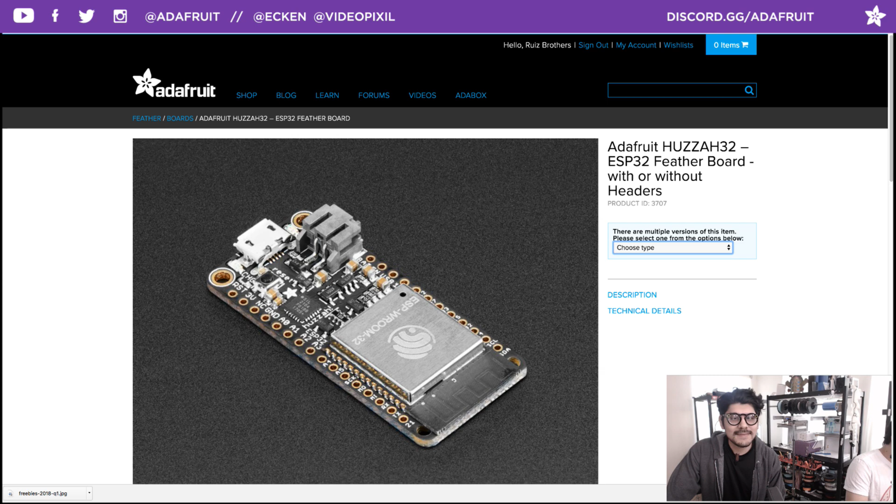There's also some hardware, links to some screws, and these awesome stickers from Pyramoni. I don't know if I'm saying that right, but you can get those stickers because they're really nice. Without them, the product just wouldn't be as cool. There's also wires, tools, and small stuff like heat shrink tubing and mounting tack, which is great to have for your projects.

Let's take a look at the software real quick. This is written by Dean, who works at Adafruit, and Dean put together the firmware for talking to the thermal camera sensor through I2C and other things.

You can check out the learning guide for the sensor. This is the GitHub page, but it's really where you want to install the Arduino libraries, and there's a SiLabs driver for getting the ESP32 up and running with your Arduino IDE. If you haven't done that yet, this guide will walk you through it. There are some different sketches along with the library, and we also have some demo code for running on a Raspberry Pi, so you can check that out.

We have some different ones, but if you're not using the ESP32 Feather, we do support other microcontrollers like the M0s, although they're not as fast at sampling as the ESP32.

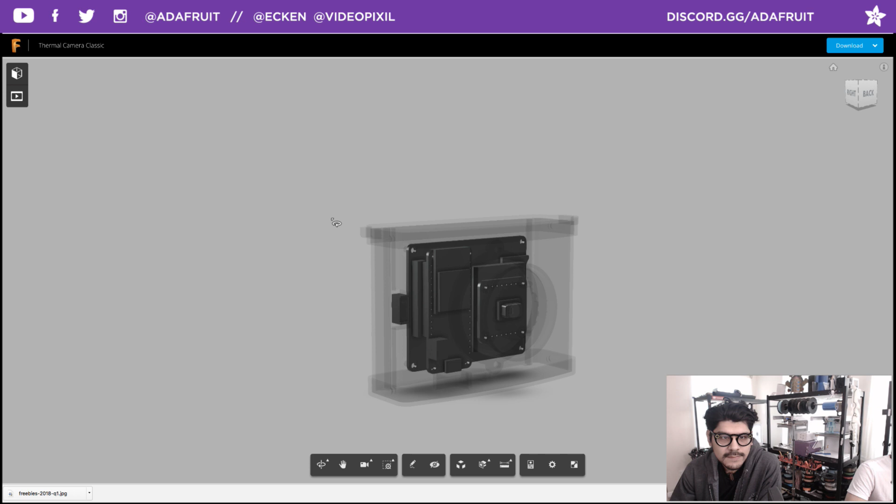To grab this source file, you just download that link and it'll give you a preview to see. This is really cool - the way Autodesk makes their public shared links, these interactive models that you can play with in your browser. Then you can download it using the top left or top right link, and you can download it in different file formats, or just grab the STLs if you want.

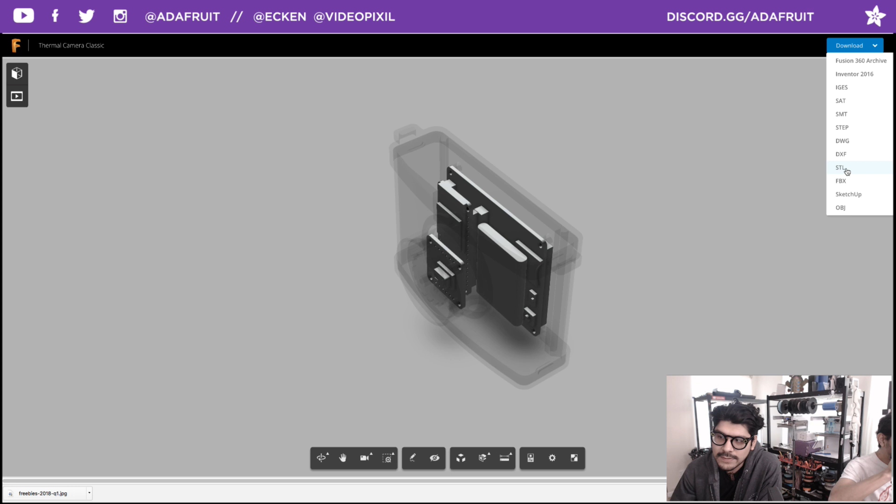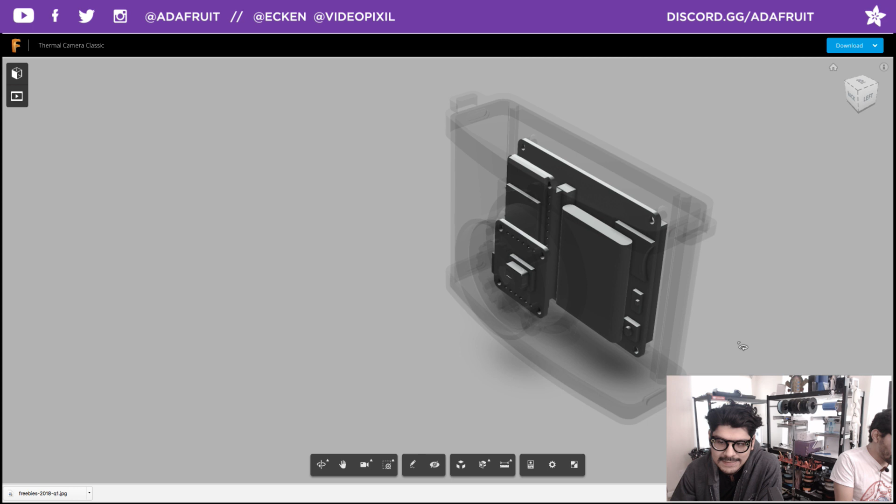If you download it as the Fusion 360 archive, you can extract the components like the AMG8833 thermal camera sensor or the ESP Feather. And the battery - I have a 500 milliamp battery here - there are some features here in the display that are definitely necessary if you're doing a project that needs to break these out. There's a micro SD card slot, a built-in on-off switch, and a reset button.

So it's really handy to model your components out. In this case, I was able to find the exact spot where I need to fit the battery, otherwise it would fit over that reset button and bad things would happen. But other than that, it is a fully parametric design, so if you download it you can see a timeline showing all the different steps that make it come together - it's pretty neat. It's also user parameter driven.

Real quick, I want to show you guys some updates that I made to it that didn't make it into the video. Notably, there's these little loops now on this top cover, so it's really easy to pop off these covers and make custom things to it with little mounting pieces.

They have a different way to make the snap fit nubs. They're just a different shape, but built the same way, just a different shape is all. They're built with the slot tool. So this allows you to add a little loop and hook to it so you can wear it.

Probably the more important thing is to add a tripod screw. This is a 3/8 to a 1/4-20 tripod screw that we have available in the shop. We like to do a lot of camera type things, and this allows you to mount it to a tripod like this one here.

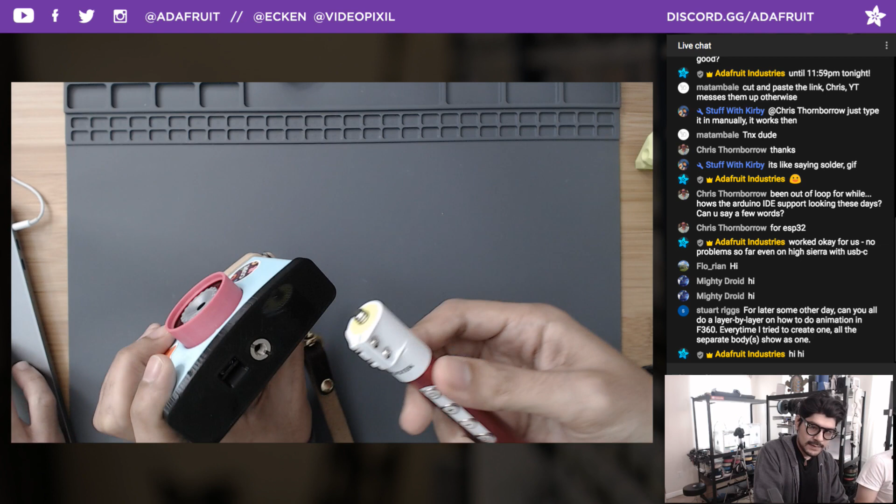This is like a selfie stick type thing. It worked out for the shoot because I needed to get it off the table, and I was like, wow, I should really design a thing for it. So here it is. I got my selfie stick with my lovely camera, or you could go with the strap here, which I guess I'll wear now. Like that. So there you go.

I actually got this for Christmas. Thanks, Pedro. It's a leather strap meant for my iPhone, but now I use it for this.

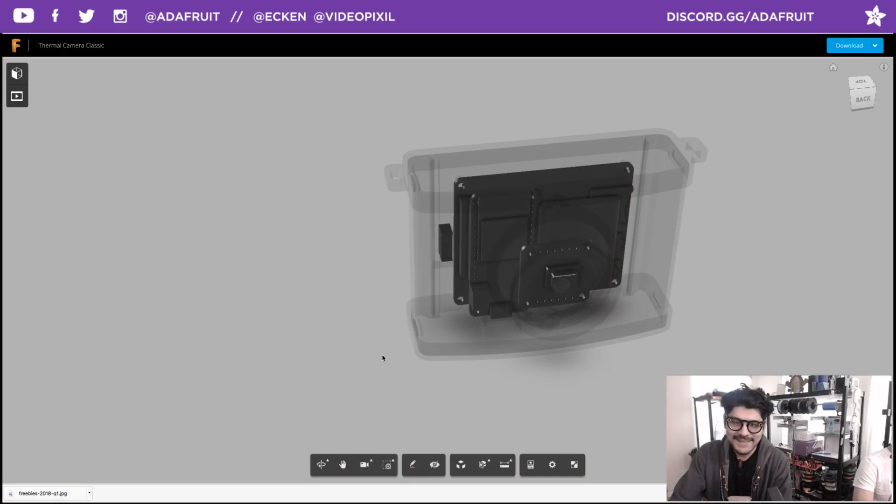Very cool. That's pretty much the updates that I made to it. And again, if you want to download the source files for it, I recommend you do so.

It's really good. Let's talk about the slice settings real quick. I've since changed up my slice settings a little bit, since we are using 2.85 filament on our Ultimakers.

Your tolerances might vary, so I thought I'd take a quick snapshot of the slice settings. Notably the line width, which is the width of the actual filament coming out of your nozzle. I have that set to 0.38. I believe the default for Cura is like 0.34, so you might want to play with those values to get the right tolerances. But other than that, the assembly is pretty straightforward.

You do need some hardware screws to attach the fake lens hood to the camera body. And I totally recommend using a brim, which helps the bed adhesion on your printer. Whether you have a heated bed or not, I definitely recommend using it, at least for the camera body, because it is a very thin frame, and that frame can fall off the printer if it doesn't adhere properly to the bed. So that's what I recommend.

Everything else is pretty straightforward. No support materials required for any of this stuff.

Moving on to the actual assembly, I always start off my projects with an on-off switch because it's pretty crucial. This one's wired a little differently, since there are header pins already soldered to the ESP32. I just went ahead and soldered the wires directly on top of the headers because they came that way. I couldn't get the non-headered version, so they already had headers.

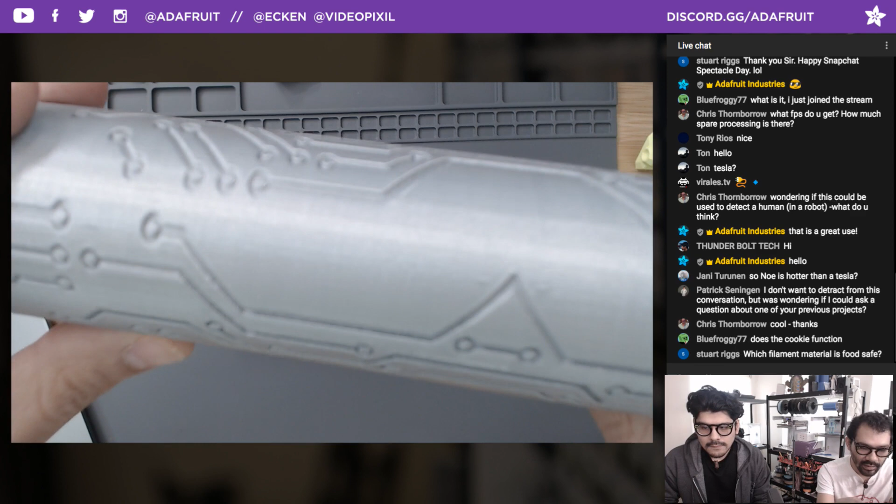Am I still on the overhead? Yes you are. Take a look at the traditional way of attaching a feature with a pattern around it - you're going to get distortion right at the edge where all the cylinders are, where it starts curving around over the texture. You can see it quite prominently here, all the circles are completely skewed.

The way we originally tried to do this was with non-linear deformers inside of Maya, but because it's not a real solid, it's just polygons, when you print this out it's going to be pretty low resolution in terms of having all the subdivisions show up in the print. And when I tried this in Fusion 360, the deformation that occurs is something we didn't like.

Then we saw a really cool tutorial by Vladimir at Desktop Makes using the brand new features inside of Fusion 360 in the sheet metal environment. So what you're essentially doing is creating this as a flange and then unwrapping the sheet metal object.

Let's take a look at the CAD of this, because it's pretty difficult to explain without visuals.

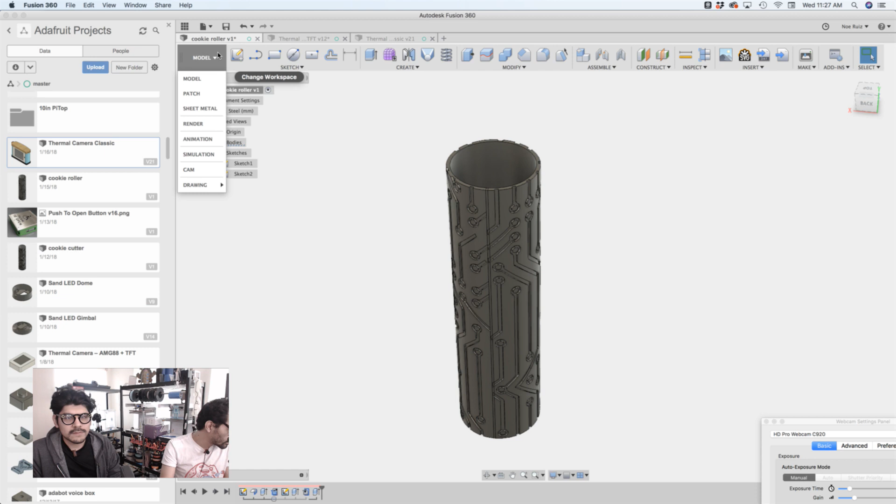Inside of Fusion 360, there's a new workspace called Sheet Metal, where you can build designs with tools specifically made for sheet metal. But you can kind of hack it or reuse it for something it's not really meant to, like this.

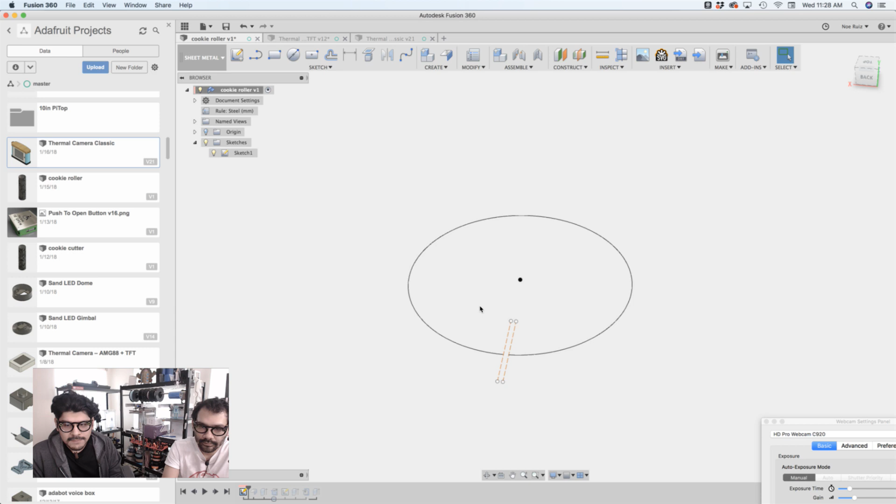If we step back through our timeline to the very beginning, this is just driven with a single sketch, basically the profile of the rolling pin. There's a little bit of a tricky thing you have to do, you have to kind of split it, we'll go over that next week.

Let's advance, just go and extrude it out. This is extruded out as a flange.

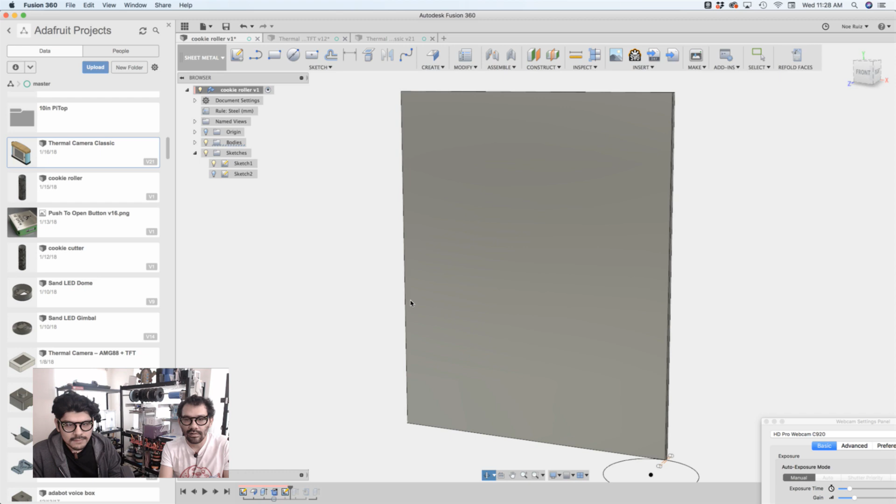Then here's the trick, which we'll talk about next week, or you can check out Vladimir's well thought out tutorial on this: unwrapping it, adding our SVGs for our patterns, punching these out, and then refolding into the cylindrical shape without any distortion. You can move around all your sketches so it has a seamless, repeatable pattern.

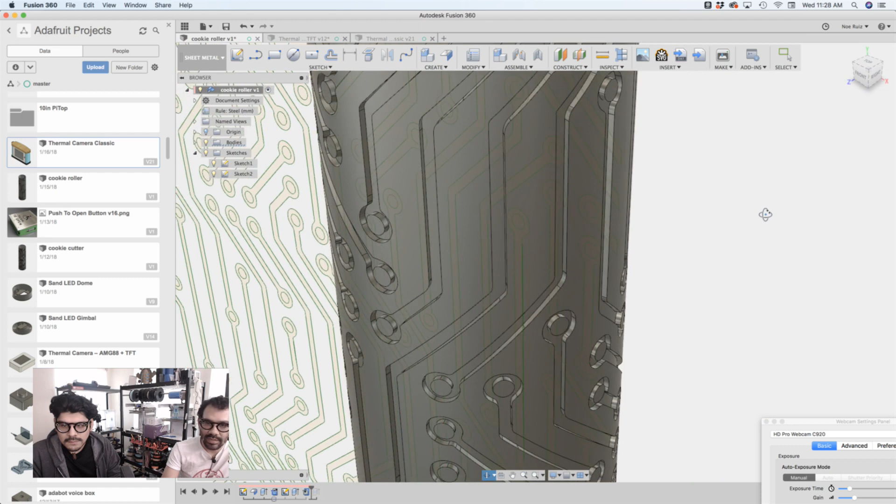And this is what we come up with: non-distorted circles, a beautiful, seamless pattern on a cylindrical geometry. Pretty cool, huh? Yes.

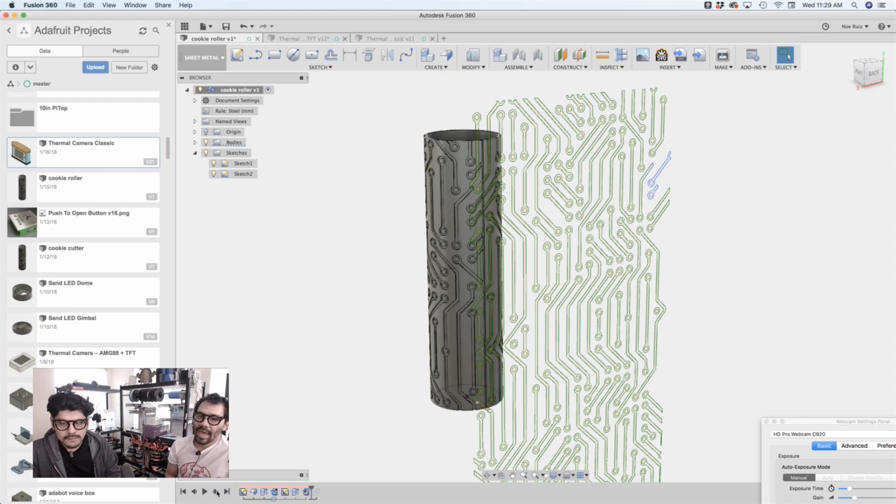Everything is all editable. It's pretty easy to drop in any other type of SVG or move any of the paths around to update. If you're looking for a way to do seamless patterns, you gotta tweak it a little bit, obviously, but once you have this technique down, it's pretty straightforward to come in and modify.

That's pretty much how I put it together. There's a little bit of other trickery you have to do to make it a solid body, but other than that, you're ready to rock with this rolling pin.

That's what we've been working on. If you check out the Instagram, you can see some of the progress. We already finished shooting the assembly on that. The only thing we have to reshoot is using non-rising dough, since store-bought dough is a big no-no. We're trying to build our own artisan cookies.

One question everybody wants to know: is PLA food safe? It should be, yeah. I don't recommend using it more than a couple times because you are going to get food particles stuck in there. You can see there's some flour and dough all stuck in here.

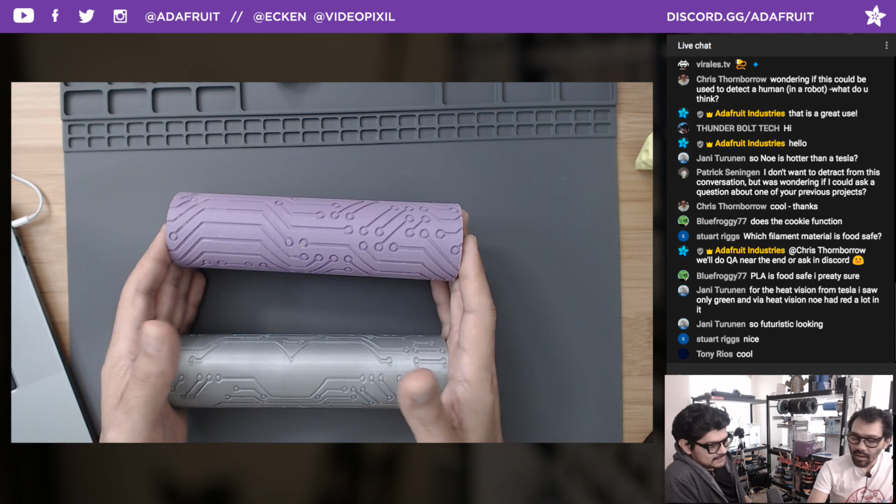So there is some food grade type of PLA, but even if it is, that's not the issue. It's the nozzle, and also all of the tiny grooves that food can get into. If it's not watertight, bacteria can form in there, getting into the little crevices.

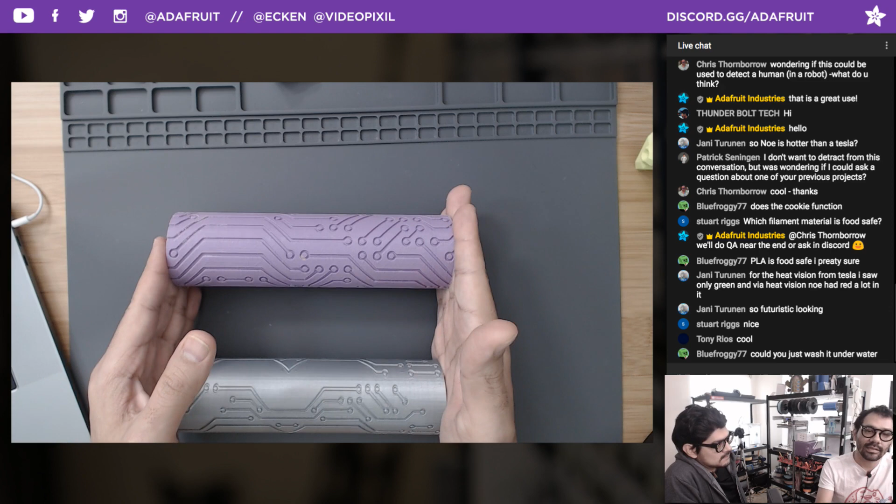You could wash it under water, though of course you don't want to use hot water, as it would melt. I did research some PLAs that are dishwasher safe, but again, it all falls down to whether it's watertight, whether bacteria or bits of food can get in between the infill and start growing. So this would be a very special, one-off event type of thing. In this case, we're making it as a project to show that you can do it.

If you were prototyping this, you'd probably want to get it machined with a laser cutter or something. Another thing I was thinking of is making a buck of this and creating a food-safe silicone mold, which is probably even better since that will last a lot longer. Just more steps to it. So it's up to you how safe you want to be.

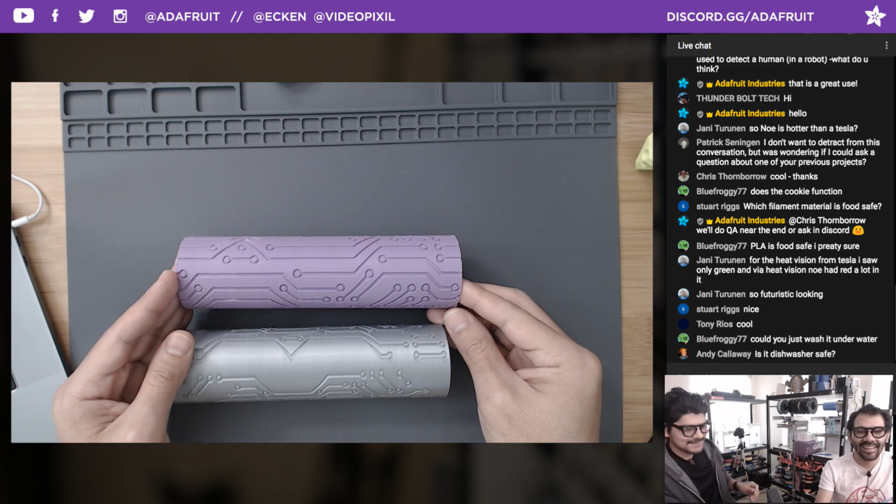Again, our job in this project was, how do we get non-distorted patterns onto this at the expense of killing people? No. It's always the design challenge that these projects are based around, so we'll have to give a little bit of a warning there.

Yeah, this isn't food safe. I mean, I saw a couple food safe ones, but...

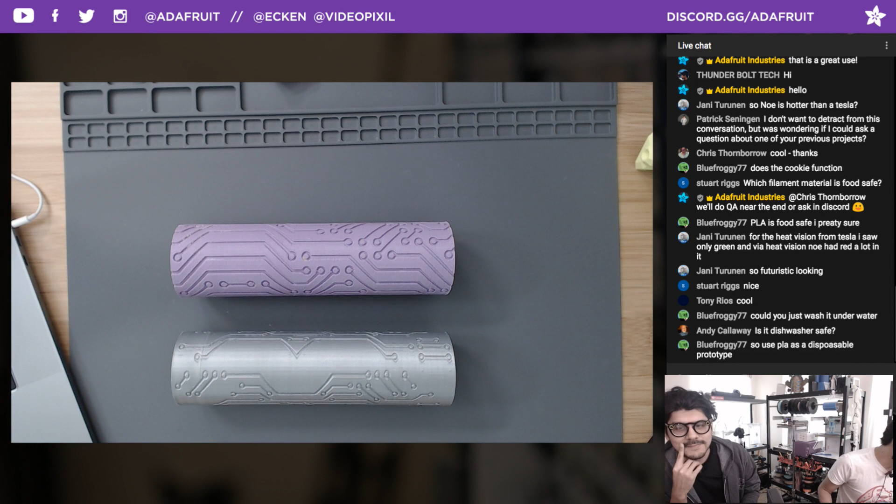To use PLA as a disposable prototype. Yeah, exactly. It's safe, it's biodegradable.

So we'll be taking a look at this next week. Other stuff, we'll be eating cookies. Yeah, we'll have some of the batches. I'm gonna go grab it to show the heat. I just wanted that cookie.

Other thing I've been prototyping is simple holders for our GoPro. We have quite a bit of adapters, but I could not find one that was a 2-prong to 3-prong for quickly attaching our tripods to them. So we have the 3/8 to 1/4 standard screw mount we have in the shop, as well as this 1/4 to 1/4, which will allow this to hook onto here.

This will go onto the GoPro 3 knuckle adapter, and then you can just add a regular quarter 20 to attach this to a tripod or whatever. Super simple design. We originally designed this for some drone mounts a couple of years ago for one of those past projects, and I noticed we did not make a 2-prong to quarter 20 adapter.

We do have like a 2 to 3 prong and one of the slot adapter ones. So I'll repost this, because I think this was when 123D was still out, so we're still in the process of updating a lot of the older projects to Fusion. Cool, so if you are in need...

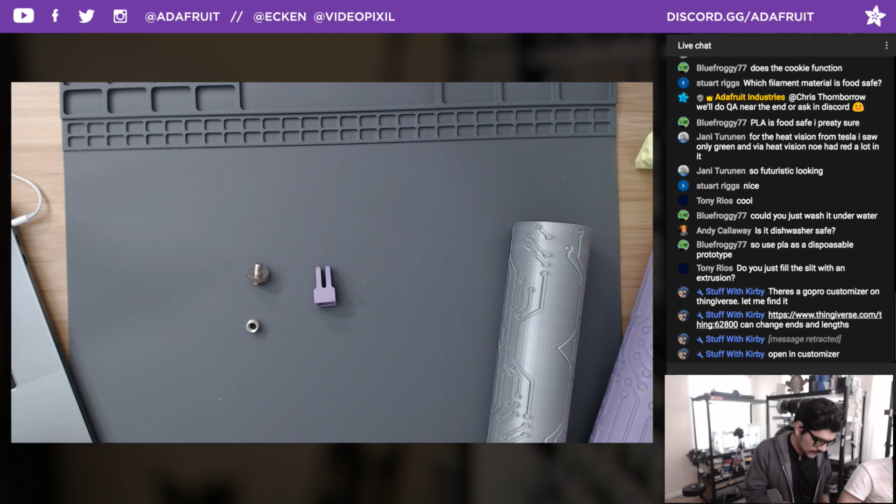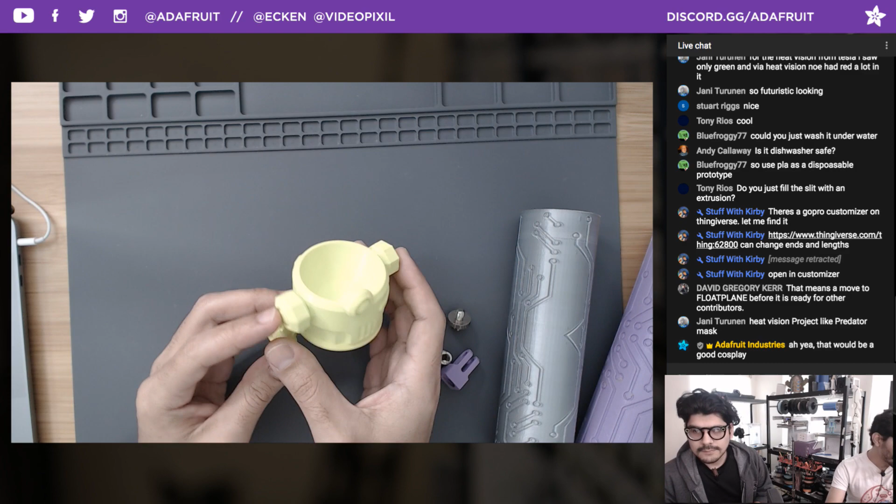Jumping into this week's Timelapse Tuesday, we got this lovely little R2-D2 model from Miguel on Cults 3D. Very nice little articulating print. Cults 3D is a repository site that's really designer friendly, so if you're looking to make money from your designs, you totally can with something like Cults 3D. This is 61 cents to download the STL file, which is great - it supports the maker, and it's a really neat print-and-place design with no support materials, and it has these little hinges.

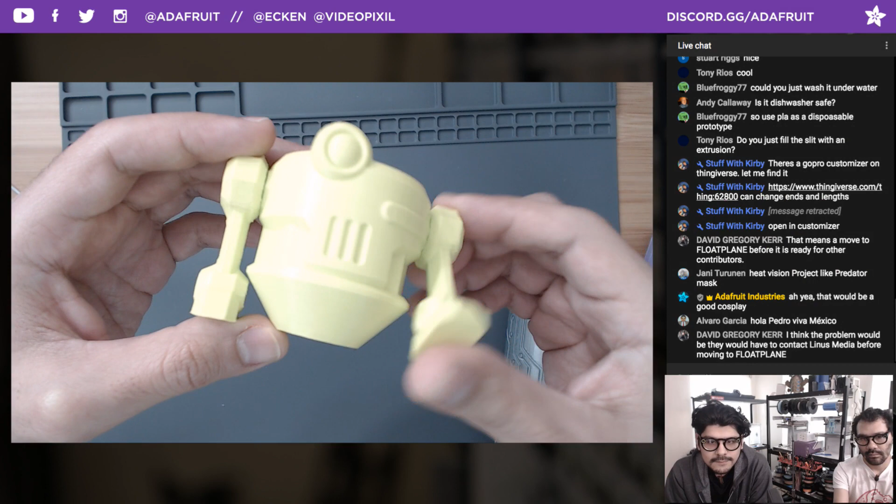I don't know what the deal is with everybody posting egg 3D printed holders. Is it because of contests or something? Is it for Easter? No, that's in April, right? But for whatever reason, it holds a nicely sized egg, and it's a nice little display piece for whatever Star Wars theme you might have going on.

As you said, the settings are pretty typical. Prints in about 2 hours, no supports, and depending on your printer's calibration, it should print out pretty good without any problems. We printed this on the Ultimaker 2 Plus Extended, using the green filament here from Melt Ink 3D. Yep, 2 hours - I'm surprised it only took 2 hours. I think the print speed was maybe 70 millimeters a second.

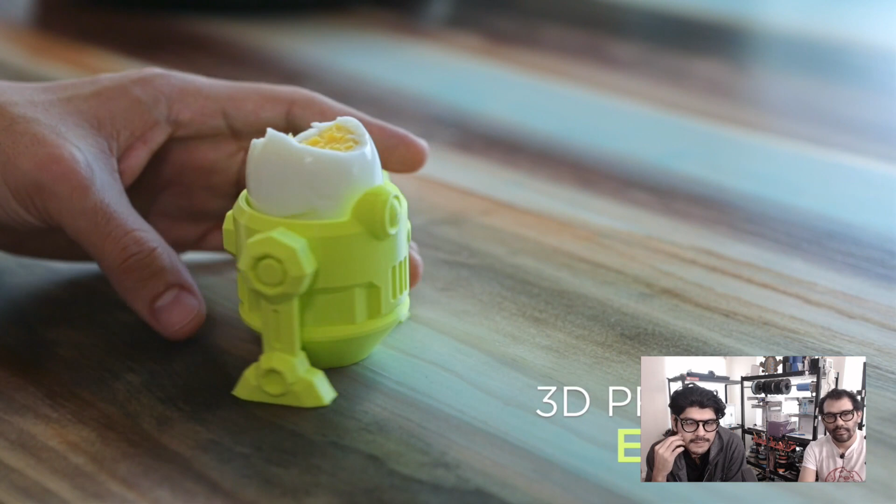It actually holds an egg. Did it tip over at any point? No. A lot of good little detail, I like the detail in it. It looks really neat, not sure what it was designed in, but it was a lot of fun printing and making this video. I'm more proud of my abilities to properly boil this egg. Yeah, we had to learn how to boil an egg properly - do you boil the water first and then throw it in there? Good job, Pedro.

So if you want to pick up an egg holder, that was again on Cults 3D. Shout out to Cults 3D, we'll probably be doing some more content with them since they're letting us.

Kirby says another achievement unlocked is peeling the shell without destroying it. No, I destroyed one of them. Oh, you did - but you ate it, so that was good.

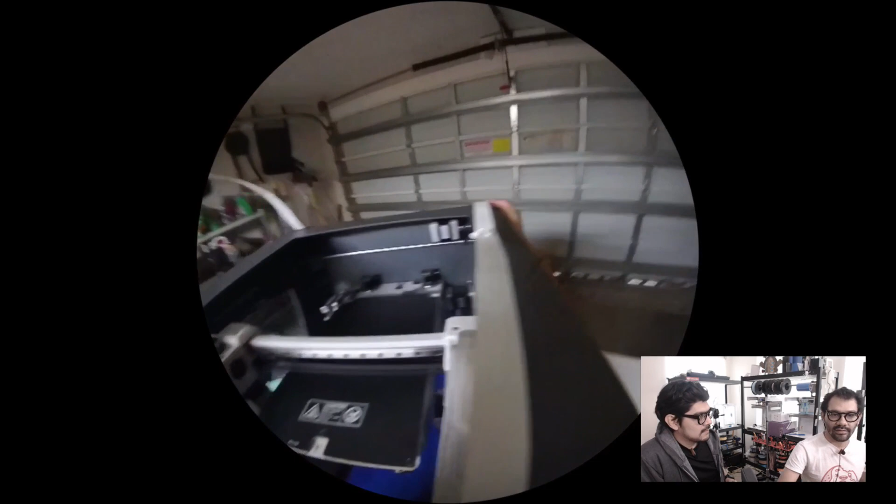And then wrapping up this week's shop talk, big shout out to Kirby. We sent out 2 of our Sigma printers for their forever home. Kirby is a YouTube content creator, he posts on Instagram, he's been a community maker for a little bit, and he's a learning guide author as well. Most importantly, he holds a ban hammer inside of YouTube, so he's a moderator - watch your comments there, Kirby's watching.

We were supposed to get some fixes done to the Sigmas, but because we had to ship them back to Spain and there were some issues getting the shipping labels, in terms of time we have like zero time to fix printers. I tried for like a whole year to get these up and running, and this isn't to say the printer is bad or anything, it's just what happens. This is definitely some easy fixes that somebody like Kirby could quickly replace a rod for, or figure out the firmware, or that this driver was wrong - something simple we just couldn't figure out.

We've gotta finish a project, I don't have time to fix the printer, I need the printer to work for me. So we're cleaning up - 2018, we've accumulated so many freaking printers, and we even got more coming in, plus the Ultimaker at the end.

What are you saying here, Pedro? It's like I just didn't cut that part out of the video.

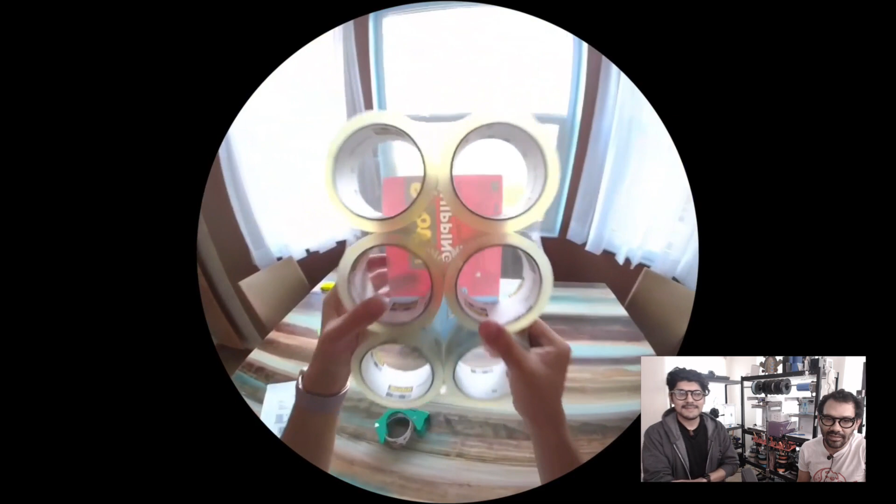The point is that we've switched to Ultimakers, and we love them. He's going to do some mods to it, and we can't wait to see what fixes follow. Follow Kirby on Instagram to see the final conclusion. Will these printers work or not? I think they will, I'm sure they will. They do work, it's just the quality is questionable. Anyway, we may have went the wrong direction.

He's saying he has to make two car trips to fix the boxes. Yeah, sorry, take the black box first.

That'll be the R17, the newest version of the Sigma. That's not a wooden Ultimaker in the garage, that's a wooden MakerBot Replicator 1, with a serial number like 700 or something, or was it 7,000? It's kind of young, early adopters here. So we'll be checking in on him for any cool updates.

There's a ton of things you can do with the bot tech - extruders, a lot of work putting enclosures on it. It's pretty solid. We sent him a Lulzbot before, and the Sigma is pretty close in terms of ideology to Lulzbot. They put all their circuitry, designs, laser cut and sheet metal files up on GitHub repos. So it's right up his alley in terms of being open and available to edit any designs or files he might want to mod. Definitely cool from that standpoint.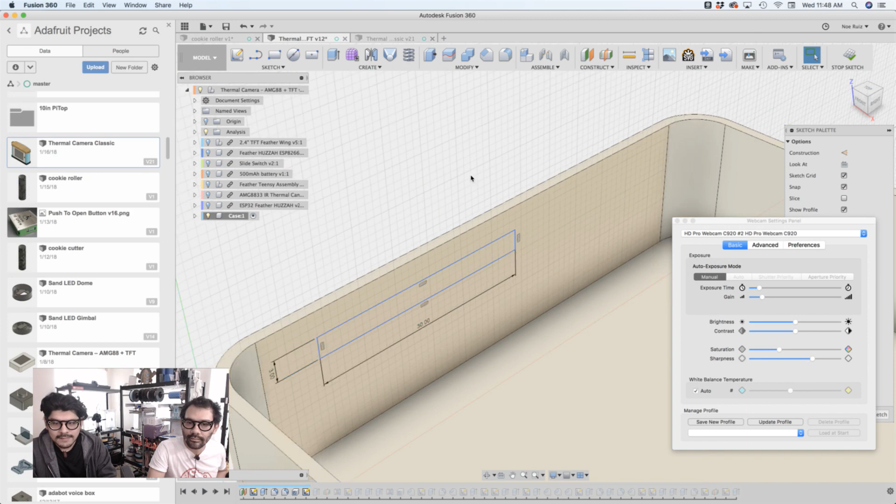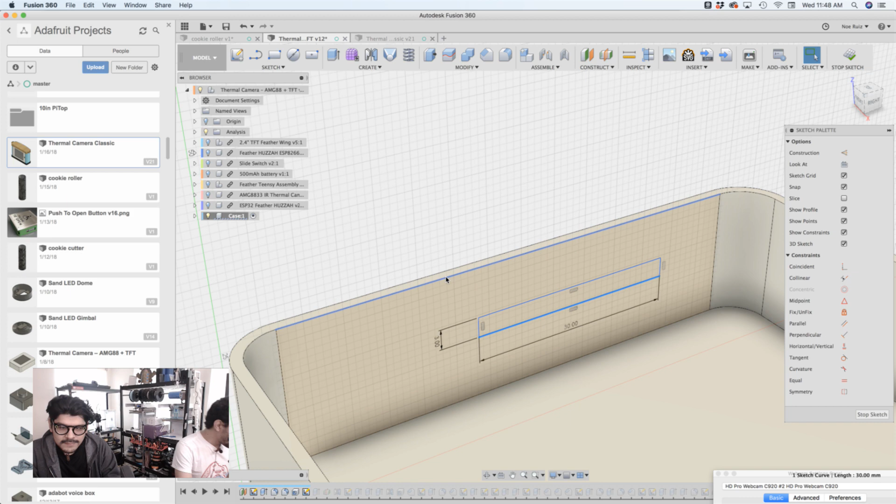Let's take a look at what I'm working on here, a sketch. I got quite a few comments from people saying there's an easier way to do what I'm trying to do here. I have this rectangle, and I can move it around the sketch. But what I want is for this rectangle to line up with this edge - this is an enclosure box, and I want to make the snap fit nub. So the easiest way to get this edge lined up, and also have a midpoint section so it's always in the center. That way, if I ever change the width of the enclosure or the width of the nub, this will remain centered.

All you have to do is hold down Shift and click the two edges you want to join, then there's a button in the constraints called midpoint. If I click on that - holy jeez, it just saved me two extra steps. That's awesome, now it's fully defined, I can't really move it. If I update the width of this guy, you'll notice it stays in the middle. That's what the midpoint constraint does.

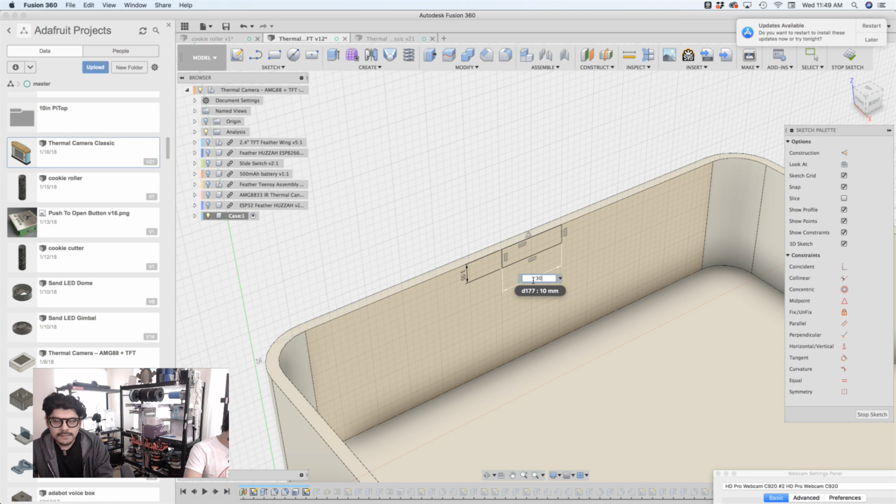But it's also locking it so that this will always stay at the top, which is what I want. I don't want this guy to be somewhere down here - it always needs to be at the top because that's how the thing is designed. Hopefully it doesn't break. There we go, and you can see the nub right there.

Hopefully that's helpful, and thank you so much to the 10 or so people who told me about this tip - I was like, oh man, that's great. I'm pretty sure you showed me that before as well. I never showed you that. No, I've shown you how to use a construction line to make a midpoint, but you don't have to make the construction line anymore.

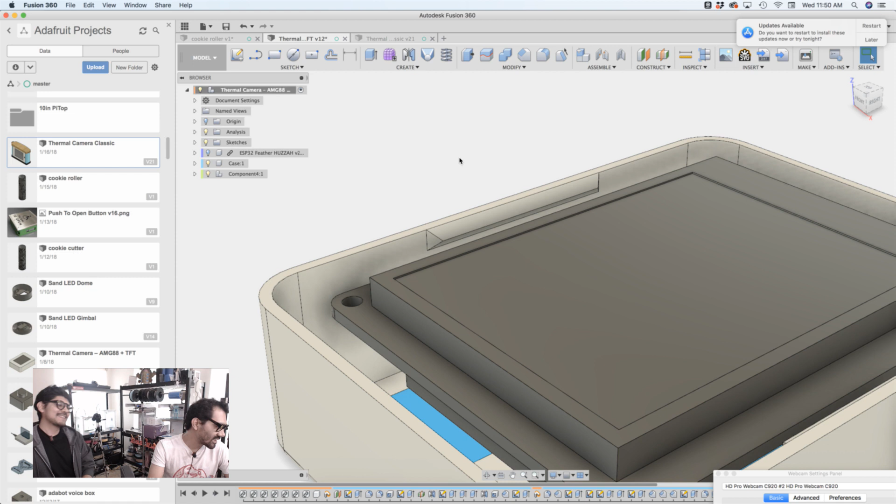You can just select the two things and hit the button, and you're done. It's awesome because they're always updating the way the tool's functions work, since day one. I just didn't know. Sometimes I try something that I know worked before and it doesn't work anymore.

Lies, I tell you. Construction lines. Back to construction lines I go. Well, Liz liked it. Thanks, Liz.

All right, well, that was layer by layer. I would love to do one about the camera body because it's a different design approach, and I think it could be useful for the Raspberry Pi type projects as well. Very, very useful. Cool.

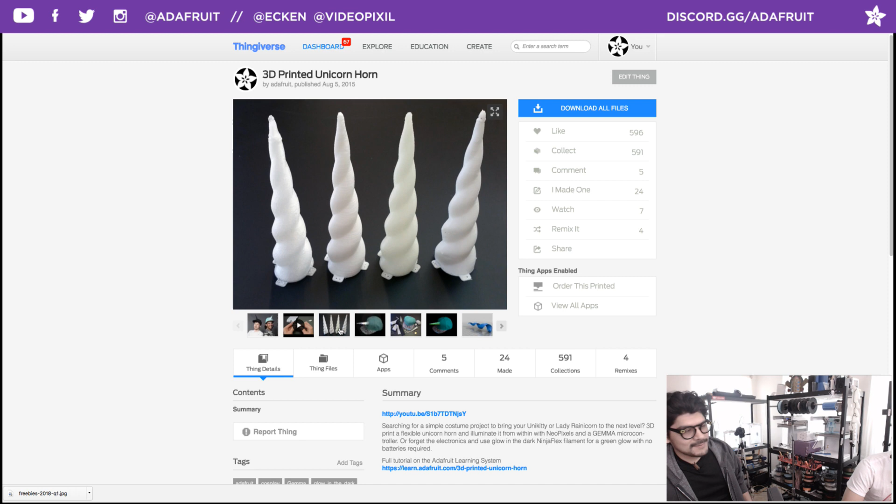That's great. Did you guys know we have unicorn horns? We have a wide assortment of unicorn horns. Best ones, no one makes unicorn horns like the Ruiz brothers. This was a cool project we did a couple years ago in collaboration with Becky Stern, who sewed a unicorn on this thing and put some fluff in there and shows you how to do it. You could also dual extrude it, but who's got a dual extruder? Check out Dana, look at Dana. That'd be cool with the black one. Anyway, great make, unicorn horns.

Pretty awesome. Let's go ahead and jump into the Discord. Some really cool show and tell shares in this channel. Trying to get rid of iOS updates, so let me live my life.

I think Discord disappeared on me. Yep. Here we put a unicorn horn in the KitchenAid counter mixer. What, you know how people put googly eyes on things? You put a unicorn horn on equipment at work? Is that what happened? Mm-hmm.

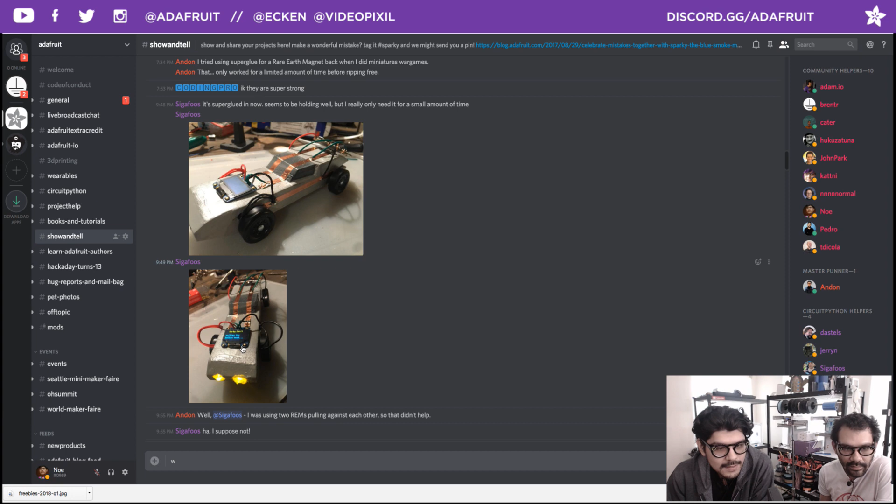Sigafoos is working on a Pinewood Derby car. This looks really cool, check this out. A circuit playground attached, 88 miles an hour, that's really cool, waiting for a push button. Derby.car, very very cool. We have some Assassin's Creed props in progress. This is cool, very very neat. I think Kester was asking how to print it.

These are always fun challenges from a design standpoint. How do you cut this up and split it for 3D printing? You were saying split it down the middle. I was saying split the bottom off and then print it upright. Yeah, but you have the thin blade and stuff. Lots of different ways to do it, and it really depends on the internal workings of it. If it's a full solid body, then you could probably just cut it in the middle. A lot of different opportunities to test and play with it.

Here is the wearable sign, Enforcer, at PAX South this year. Very, very cool. Controllable from Bluetooth, using the Feather ESP, the Feather 32U4 Bluefruit LE.

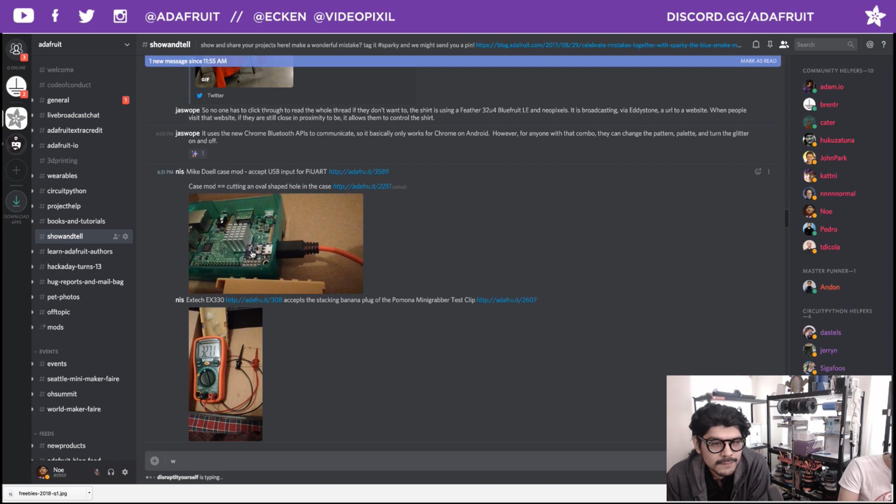Very cool. Got 5 minutes, so speed round of these. Modifications to the Raspberry Pi case from Mike Doell.

Brian, I want to shout out Brian. He's working on making a documentation video of his latest Zelda test project, which was really cool to watch. Great work, Brian. Also Brian is a featured YouTube guest on Dave Jones's YouTube channel. He got picked to make a guest video for the EEVblog channel. That's a great way to get a nice explanation of the 8266 libraries. Check out the video. Brian actually wrote the YouTube API one for the ESP32.

That's awesome. Next up, we got some stuff from Adam Combs, looks like some more electron microscope stuff. Don't forget to check out Show and Tell every week to see all the updated progress on that. Andrew is sharing his build of the Minty Pi, so you can check that out as well. Looks like number 2 is making a trellis button pad, probably.